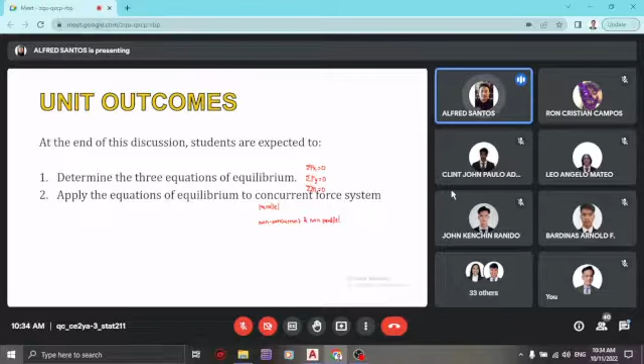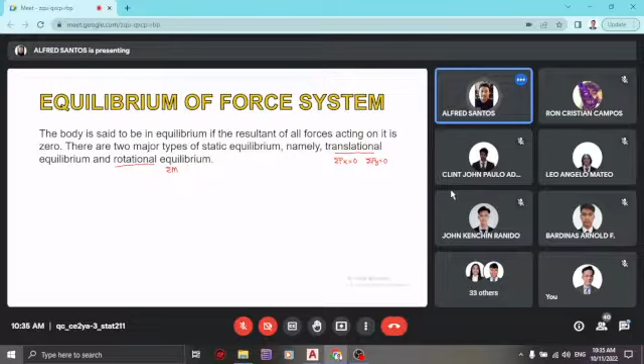Concept-wise: the body is said to be in equilibrium if the resultant of all forces acting on it is zero. There are two major types of static equilibrium: translational equilibrium, meaning it won't translate into x and y direction, so summation Fx is 0 and summation Fy is also 0. And rotational equilibrium means it won't move or rotate, so summation moment equals 0.

For the concurrent force system, the applicable formulas are the two translational equilibrium equations: summation Fx is 0 and summation Fy is 0. Why? Because in a concurrent force system, all forces meet at a certain point or common point. If you take the moment at that point, the moment of all those forces is 0, so it's useless to use summation moment. That's why it's not included, and summation Fx and summation Fy are used instead.

So where do we use the concurrent force system? We'll use this in the method of joints, for the analysis of trusses.

Using method of joints. So later on, next meeting, we'll go to trusses or analysis of structures. Let's apply what you learned here to our topic next week. And then the second force system is parallel force system.

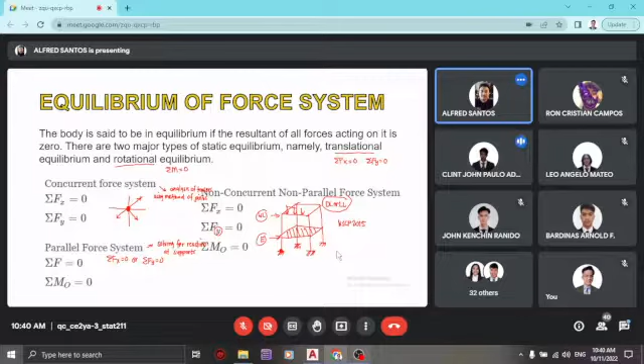So let's go to concurrent force system before we proceed with problem 1 and 2. We mentioned earlier the formulas involving concurrent force system: summation Fx is equal to 0 and summation Fy is equal to 0. And there are important points that need to be remembered.

Two forces are in equilibrium if they are equal and oppositely directed. So for example, you have a 50 kilonewton force upward. This object will only be in equilibrium if it also has a 50 kilonewton force downward. When summation Fx is 0, summation moment is 0, and summation Fy, which is 50 minus 50, they are equal to 0. Meaning, when all three are equal to 0, our object is in equilibrium.

Same goes with horizontal forces. If you have 20 kilonewton here, the object will only be in equilibrium if you have 20 kilonewton to the left. Understood? So that's important point number 1.

Number 2, three coplanar forces in equilibrium are concurrent. So if you have three forces, for them to be in equilibrium, they must be concurrent or form a force triangle. Same goes with 3 or more concurrent force systems in equilibrium forming a closed polygon when connected head-to-tail. So how does that work? For example, you have 4 forces: this is F1, this is F2, this is your F3, and this is your F4.

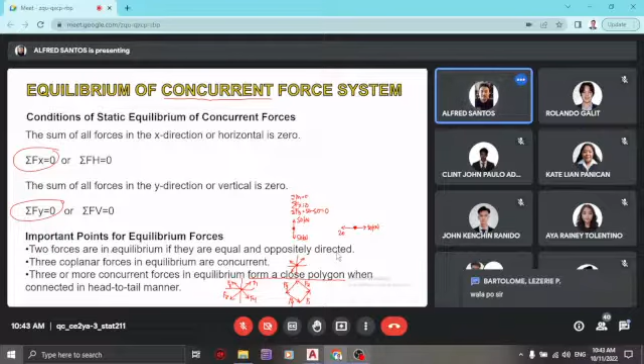So, problem number 1. So, the figure represents the concurrent force system acting at a joint of a bridge truss. So, truss yan. Tapos, concurrent force system. So, nabanggit ko na kanina, di ba? Kapag method of joints, ang gagamitin natin sa pag-analyze ng truss, gagamit ka ng concurrent force system. Okay? So, the system, determine the values of P and F to maintain equilibrium of the forces.

Okay? So, since concurrent force system yan, dalawa lang yung applicable na formula. So, they are summation Fx and summation Fy, which are both equal to 0. Okay? So, if that's the case, may dalawang method dyan. It's either you can use your calculator using mode 5.1 or mode 5 two unknowns, dun sa mga Canon na calculator. Dun sa mga Casio, it is mode 5.1.

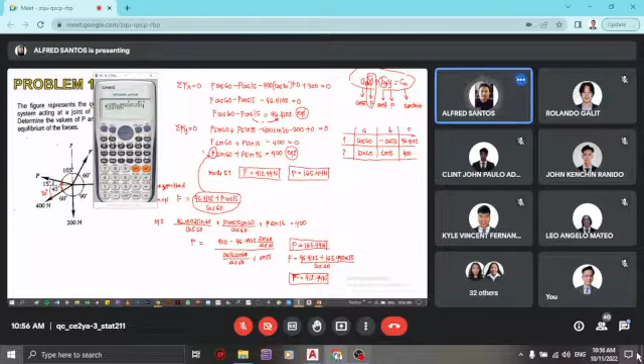Wala naman. Hello? Wala po, sir. Mark Ferrer, may question ka? Wala po. Rolando, may question ka? Wala naman po. Jerica?

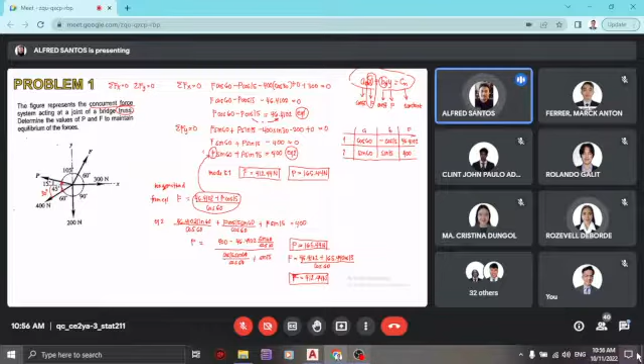Sa problem 2, irapan natin ng konti lang. So, the system of knotted cords shown in the figure below supports the indicated weights. So, compute the tensile force in each cord. So, alam niyo behavior ng tension or tensile force? It is to pull away, or to pull. So, pag pahatak, lagi siyang papalayo sa joint.

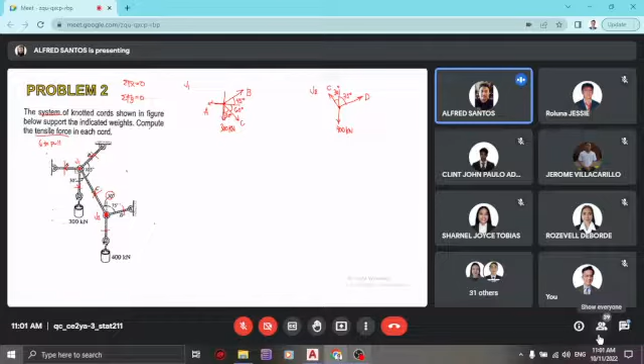So hindi pwedeng unahin si J1. Bakit? Kasi dalawa lang yung equations mo. So pag dalawa yung equations mo, dapat yung isa-solve mo una, dalawa lang yung unknowns. So hindi mo masasolve si A, B, C using just two equations only. J2 yung unahin natin. So sa J2, summation Fx is equal to 0.

So it is negative C sine of 30 plus D sine of 75 is equal to 0. And then summation Fy is equal to 0. So you have your C cosine of 30 plus D cosine of 75 minus 400. Simplify natin: C cosine of 30 plus D cosine of 75 is equal to 400.

And then you can apply mode 5.1. This is your C and this is your D. So it is negative sine 30, positive sine 75, and then 0. And then cosine of 30, cosine of 75, and then 400. So what's your C? Kayo muna.

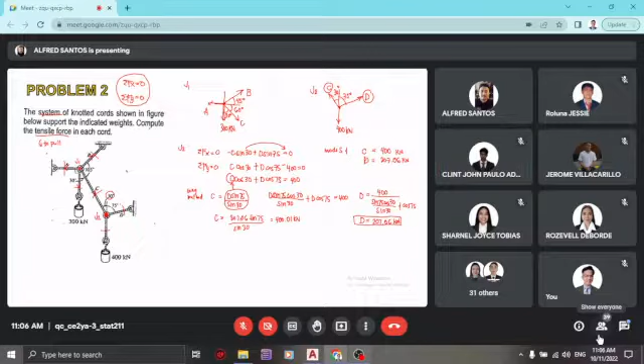Okay, so you have now your value of C, which is 400. So it means this is also 400. So nakita nyo na important points kanina, yung number 1. So yung C, saka yung C dito. So they are equal and they are oppositely directed. So pag pinagsama ko sila, it means they are still in equilibrium. Tama?

So tama yun, no? So punta tayo kay J1. Okay, and first, so I use Fy is equal to 0. Bakit? Kasi pag inuna ko si Fx, dalawa yung unknown. So nandyan si A, nandyan si B. Pero pag inuna ko si Fy, meron bang Y component si A? Wala naman, di ba? So it means I can immediately solve for B, using summation Fy is equal to 0. So it is B sine of 45 minus 300 and minus 400 sine of 60 is equal to 0. Kasi nga, 0 yung Y component ni A. Kasi horizontal force siya. Okay?

Nasundan? So solving for B, it is 300 plus 400 sine of 60 divided by sine of 45. So this is your B. So this is 914.16 yata or baliktad, 916.14. So pa-solve na lang ako. So what's your answer? Tama lang, sir. So 914.16, your B.

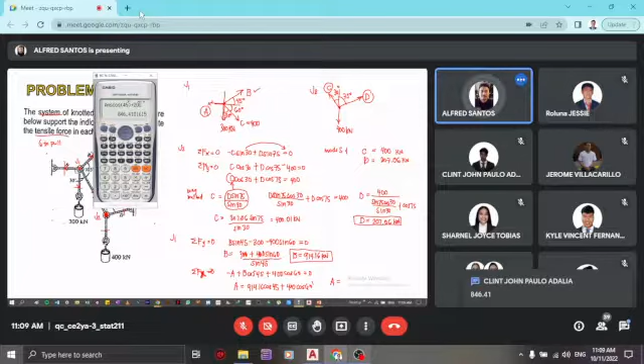Okay, so your A is equal to 914.16 cosine of 45 plus 400 cosine of 60. Okay, so ang nilipat ko, si A yung nilipat ko sa kabila, no? Kaya naging positive siya. So this is your A. So what's your A? 800. Ano yung A mo? 846.41. Okay, thank you, Clint. Okay, so that's your A, B, C, D. No, yung tension sa A, sa B, sa C, and sa D.

Okay, so concurrent forces lang yan. No? So, kaya? Naintindihan? Or may tanong? So, sabihin nyo lang pag may tanong kayo.

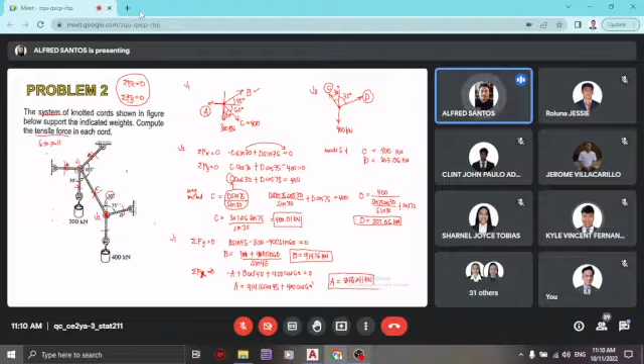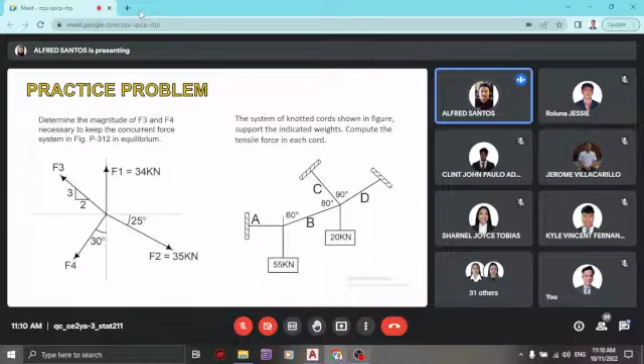So, anyway, so this is your practice problem. So, try nyo na lang mamaya if you have time. No? Okay, so parallel force system tayo. So again, alam niyo yung parallel force system, yung resultant niya paano kumuha, no? So it is summation F and summation moment then to solve for D. But this time, hinahanapin natin yung mga unknown forces. Hindi natin hahanapin yung resultant nila. Kasi alam naman natin kapag equilibrium, yung resultant niya is 0. Okay? So ano yung hanapin natin?

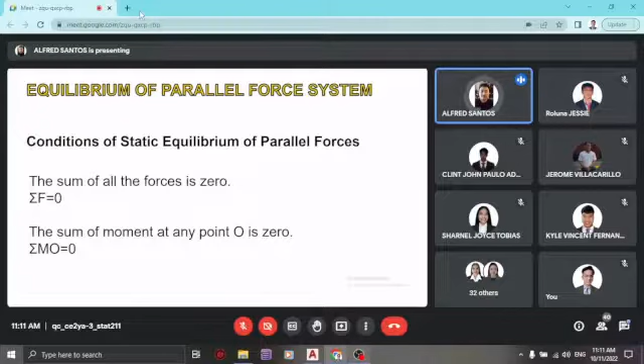So nawawala dito yung mga reactions sa support or simply yung mga reactions. No? So kung vertical forces lahat ng given, definitely yung reaction mo are vertical reactions. Okay? So nabanggit ko na kanina, isosolve natin yung mga reactions. So these are the conditions of static equilibrium pag parallel forces yung usapan. So summation F is equal to 0 and sum of moment at any point O is 0. Okay? So opposite tayo sa problem 1, involved pa din dito yung mga distributed loads, no, yung rectangular, triangular load and trapezoidal load.

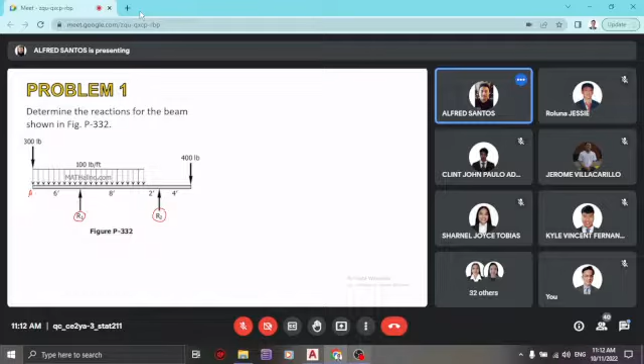Okay? So determine the reactions for the beam shown in the figure. So this is the figure which came from mathalino.com or dun sa libro lang ni Ferdinand Singer na Engineering Mechanics, yung kulay blue. Okay, so ang hinahanap sa problem, yung reactions at point 1 or reaction 1 and reaction 2. Okay, so let's say this is your point A, point B, point C, point D, and point E.

Okay, applicable daw na formula are summation F. So this time Fy tayo kasi vertical forces tayo, no? And then summation moment at any point O is equal to 0. But take note of this, no? So bigyan ko kayo ng tips or ito talaga yung actual step, no? So the first step is you'll apply summation moment at any point of support or point of unknown.

Okay. So magmo-moment ka at any point of support, reaction, or unknown. So for example, ito yung given natin. So saan ako magmo-moment dyan? Which is the first step. Saan? Saang point? Sige nga.

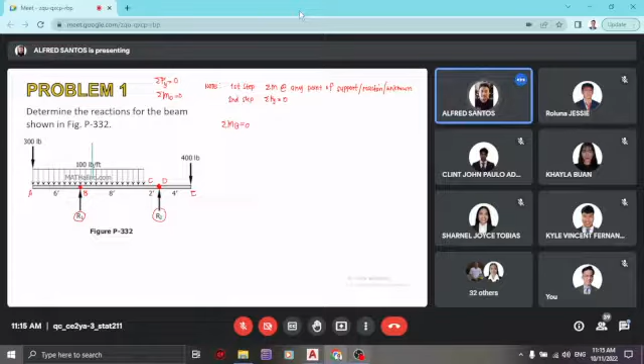Okay, and then the second step will be summation forces vertical is equal to 0. Okay, so start tayo. So, summation moment at B is equal to 0. So, pakita ko rin yung moment sa D mamaya. So, solve muna natin yung resultant neto ni 100 pounds per foot or yung uniformly distributed load natin. So, this is 100 times 14 or WL, which is equal to 1,400. Area lang ng rectangle. So, your height is 100 and your length is 14, 6 plus 8. And then this is 7 feet.

Bakit? Kasi sabi dun sa definition ng resultant ng distributed load, the value of the resultant of the distributed load is equal to the area of that distributed load and it acts on the centroid of that area. Kung natatandaan nyo yan. So, therefore, this is also 7 feet. So, kalahati-kalahati. L over 2, L over 2. Okay, so if this is 7, and then this is 8, yung buo na to.

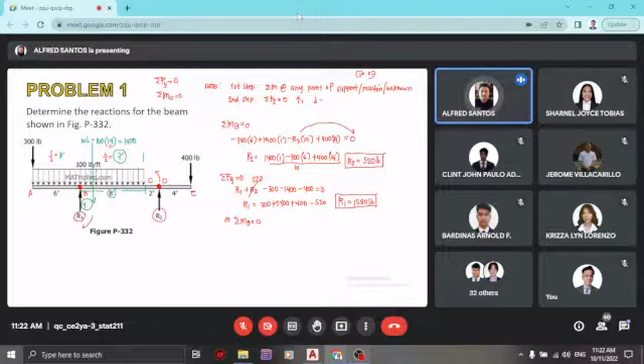Or you can use summation moment at D is equal to 0 to solve for R1. Kasi pag nag-moment ako kay D, 0 yung moment ni R2. So therefore, may eliminate siya. So we can solve for R1. So try natin, para marunong kayong mag-moment. So negative 300 times, what's the distance from point D? Sige, tingnan natin kung marunong na mag-moment.

16, sir. 16. Okay. Thank you, Jerome. Plus R1, which is multiplied by... Sige, 10, guys. 10.

Sino yan? Si Kyle? Yes po. And then minus 1400 times... sige, kahit sino, 7. Kyle, ano sa'yo? 9. Okay, 9. So saan galing si 9? 7 saka 3, 2. Or 10 minus 1.

Okay, and then plus 400 times 4. Ito hindi ko natatanong yan. Obvious naman 4, no? Is equal to 0. So solve natin si R1. Lipat ko yung constant, lahat ng constant sa right-hand side ng equation natin. So it's 1400 times 9 plus 300 times 16 minus 400 times 4, and then divided by 10.

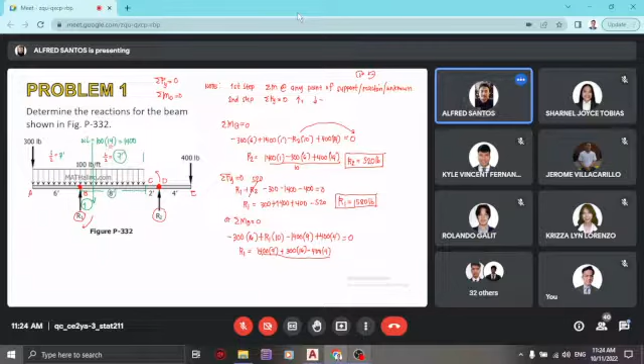So what's your R1? It must be the same, no? Tingnan natin kung same siya. Syntax error. So that's also 1580.

So pili kayo kung saan kayo mas komportable, no? Pero pag ako yung nagsasolve sa on my own, tatlo yung ginagawa ko, tatlo na yan, para ma-check kung tama ba yung sinosolve ko.

Okay? So that's your problem number 1 for parallel forces. So proceed tayo sa problem 2, kung wala kayong tanong.

Okay, problem 2. Seems wala naman tanong, no? So ganun pa din. Let's say this is your point A and then this is your point B. So your first step is summation moment at point of unknown or point of support.

So moment ako sa A. Nasanay kami na sa kaliwa lagi nagmo-moment, para same lahat yung direction ng pababa sa kanan pataas. So pag nag-moment ka sa kaliwa, pag pababa yung force mo at nasa kanan siya, it means clockwise, positive siya. Kung pataas naman yung force mo doon, nasa kanan siya nung point A, it means counterclockwise yung direction niya.

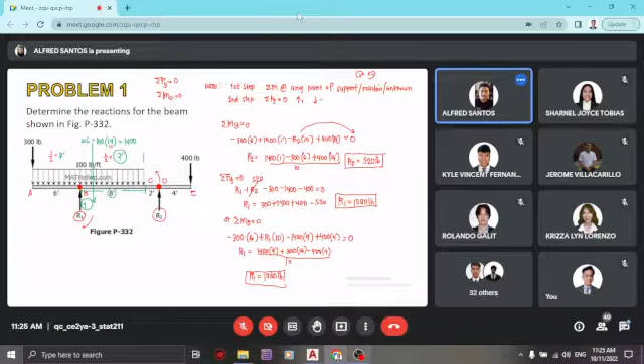Okay, para na lang kung ganito, kagaya nung kanina. Ito, pababa to, kaso negative siya kasi nasa kaliwa siya. Anyway, basta clockwise, counterclockwise, alam niyo naman na yun.

So but first, kuhanin muna natin yung mga resultant natin, kasi meron tayong distributed loads. Pero kung master niyo naman siya, kahit hindi niyo na-drawing dito, which is ganun yung ginagawa namin pag pagtungtong niyo ng higher years.

Pakita ko lang, hindi na namin ginagawa, kinukuha pa yung resultant pati yung centroid, para lang ma-solve mo. Ayan, for example ito, 8 times 6 times 3, that's WL times L over 2, di ba? Nakikita nyo? 8 yung height, 6 yung length niya, tapos yung distance niya is 3. So that's 8 times 6 times 3. Wala na yung resultant niya, hindi na namin ginagamit.

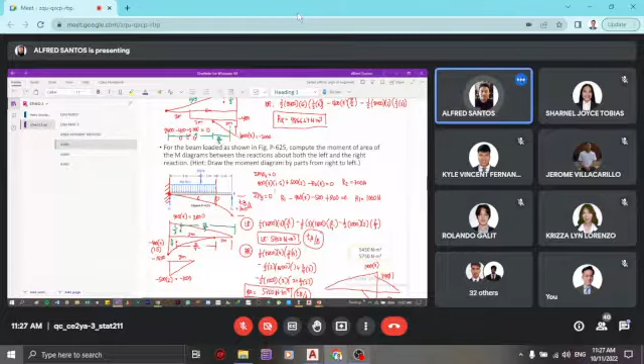Teka lang, pakita ko lang sa inyo na hindi na siya ginagamit normally. Ayan, wala din siya, so that's 400 times 3 times 1.5. 400 yung W, yung L mo is 3, 2 plus 1, tapos kalahati ng L, so that's 1.5. Mapapractice din kayo habang tumatagal, na ganun yung gagawin nyo. Dapat ganun yung mangyayari sa inyo pag tungtong nyo ng higher years, yung hindi na ginagawang ganito.

So 6 times 3, so this is 18, and then this is 1/2 WL, so that's 15 times 3, or equal siya sa 22.5. Okay? And then centroid natin, so this is 1.5, this is 1.5, and then this is 2L over 3, so this is 2, and then this is L over 3 or 1, 1 meter.

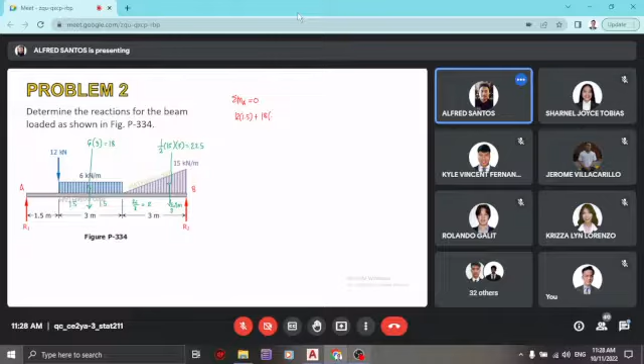Okay, so moment tayo sa A is equal to 0. So it will become 12 times 1.5 plus 18 multiplied by, what's the distance of 18 about point A? Ano distance natin? 3, sir. 3. Okay, so saan nanggaling yung 3?

So it is 1.5 plus 1.5, and then plus 22.5 multiplied by, ang distance natin, 6.5, sir. Okay, 6.5. So saan nanggaling si 6.5? 1.5 plus 3 plus 2, which is etong 2, etong 3, sa etong 1.5.

And then minus R2 times 7.5. Okay? So simplify natin para ma-solve natin si R2. Lipat ko siya sa kabilang side para siya yung maging positive. And then 12 times 1.5 plus 18 times 3 -- alam na ako saan nanggaling yung 3 -- at plus 22.5 times 6.5 divided by 7.5.

So this is your R2, equal siya sa 29.1 kilonewton or 23.4. Alin ba? Alin ba yung tama? So kayo yung last section para dito, no? Kaya huwag kayong magtaka kung kabisado ko na yung sagot.

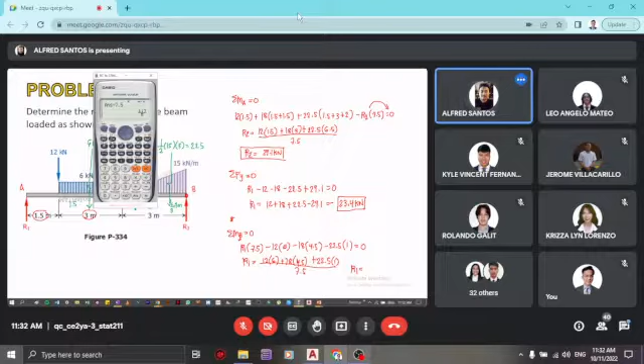So your R1 is equal to 12 times 6 plus 18 times 4.5 plus 22.5 divided by 7.5. So let's multiply by 1. So your R1 must be equal to 23.4. No? So that's 23.1. I mean 23.4, sorry.

Okay, may question ba so far? So we can proceed with problem 3. Wala naman.

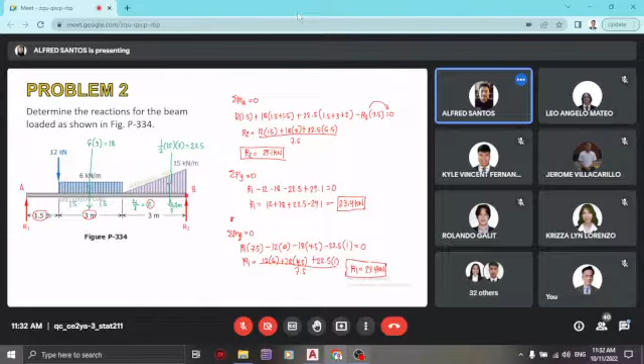Okay, problem 3 tayo. So this is a combination of two parallel forces. So katulad kanina sa system of knotted cords, ganun din dito. So the upper beam shown in the figure is supported at D and a roller at C, which separates the upper and lower beams. So determine the values of the reaction at A, B, C, and D. So neglect the weight of the beams.

So if I'm about to draw the free body diagram, they will meet at this point, at point C. Okay? So if this is your upper beam, meron kang 160 kilonewton, you have here 190 kilonewton. And then sa every support, meron kang reaction lagi. So this is your Dy. And then this is your Cy. Okay, so support ni Cy saka ni Dy yung 160 saka yung 190 kilonewton.

So ang distances nila, this is 4 meters daw. This is also 4 meters. Tapos ang total distance ni Cy saka ni Dy is 10. So therefore, this is 6 meters. Okay, and then meron kang lower beam.

So sa lower beam, you have here your A and your B. So you have here AY and BY. So you have here 400 kilonewton. And meron kang CY dito. So ibig sabihin lang nun, yung load na 160 saka 190, pag kinuha mo yung reaction sa CY saka sa DY, matatransfer yung load na yon sa lower beam at point C. Gets nyo?

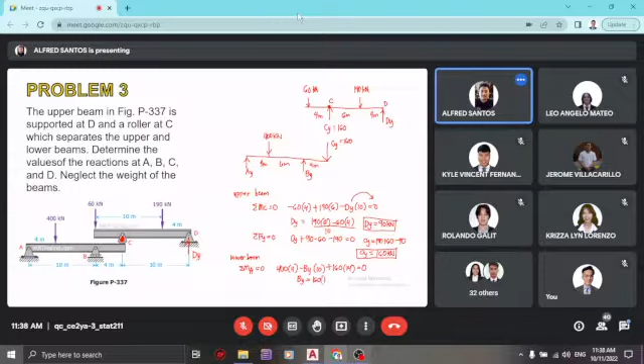Okay, and then punta tayo sa lower beam. So this is summation moment at A is equal to 0. So therefore, we can solve for By. So it is 400 times 4 minus By times 10 and then plus 160 times 14. So this is your By. Lipat ko sa kabila para siya yung maging positive. So divided by 10.

10, naging 100 na. So what's your By? 384. Yeah, solve niya.

384. Okay, so that's 384. And then to follow yung AY which can be solved using summation Fy is equal to 0. So this is your AY minus 400 which is a downward force. By is 384 and then minus 160. So what's your AY?

Lipat mo lahat sa kabila yung constant. So it is 560 minus 384, or equal siya sa 176. Tama? 176? Okay, tama yan.

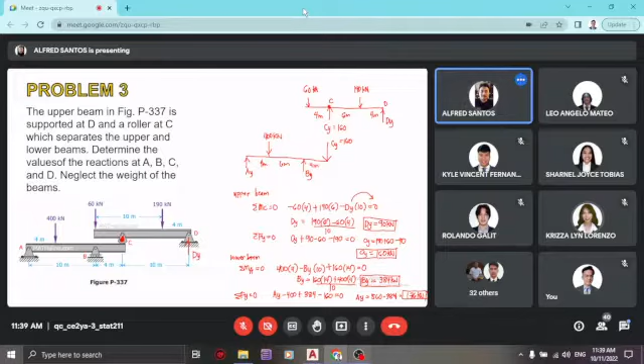Tama ba? Opo sir, okay. So that's your parallel forces or parallel force system. Okay, so you have your practice problem, number 4. Try nyo lang sagutin. Madali lang naman siya, para lang ma-practice kayo mag-moment kasi gagamitin natin siya sa analysis of stresses.

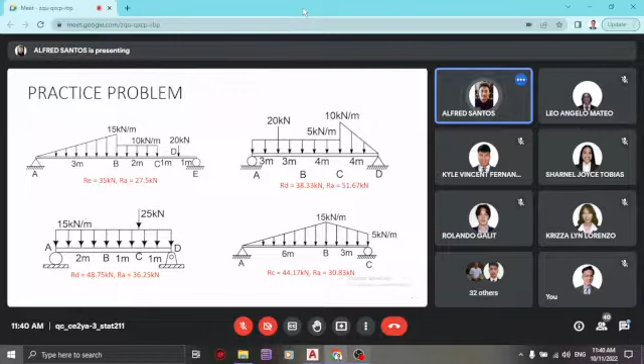Okay, so down to the last 2 problems, last topic tayo. So non-concurrent, non-parallel force system. Tingin ko kaya pa naman, no? Kaya niyo pa? 2 formulas pa lang naman ginagamit natin. 3 equations lang naman to. So 2 problems, madali lang naman to.

Non-concurrent, non-parallel force system. Dito gagamitin na natin yung 3 equations of equilibrium. So they are summation Fx, summation Fy, and summation moment at any point O, all equal to 0. Okay? So pwede siyang mag-solve ng 3 unknowns sa system. And kung lalagpas siyang 3 unknowns, so indeterminate structure na yon. It means it can only be solved using the principle of strength of materials and theory of structures, which is your subject for second year, second sem, yung strength of materials or MECDEF na tinatawag, mechanics of deformable bodies.

And then yung theory of structures, subject niya siya sa summer ng second year and sa first sem ng third year.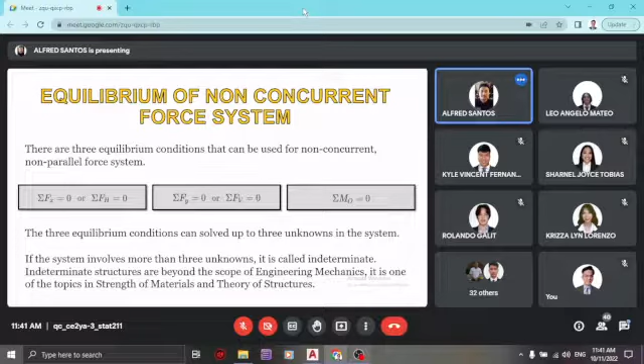Okay, so a boom AB is supported in a horizontal position by hinge A. So meron kong hinge at point A. Mamaya discuss natin ano yung hinge, no? Which runs from C over a small pulley at D as shown in the figure. So compute the tension T in the cable. Ito yung nawawala. And then the horizontal and vertical components of the reaction at A. Neglect the size of the pulley at D. So meron kang nawawalang horizontal and vertical components daw ng reaction at A.

So lagi yung tatandaan kapag pin support or hinge support, ganito yung normally yung itsura niya. Meron kang triangle and meron siya pinagpapatungan na fixed end or fixed position na horizontal o eto. No? So lagi yung tatandaan, meron kang 2 reactions dyan.

Okay, so meron kang RY and then meron kang RX. That's why ang pinapahanap sa problem is eto. Eto pala, horizontal and vertical components of the reaction at point A. So kung lalagay ko siya dito, meron kang AY dito and meron kang AX. And then hahatiin ko yung cable para ma-expose yung tension. Para pag dinawin ko yung FBD ng boom AB, ito na lang yung kalalabasan niya.

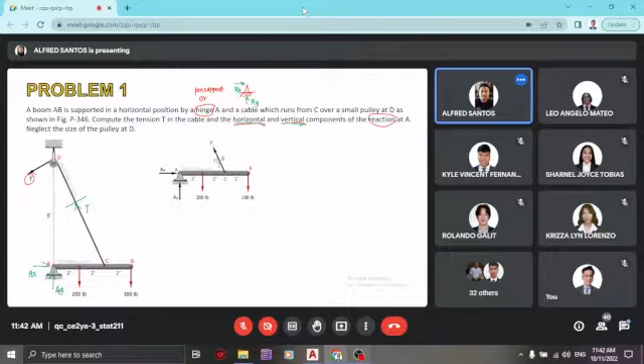Okay, so this is FBD of boom AB. Okay, so you have your AX and your AY. Tapos yung tension T. So saan galing yung slope niya?

Yung 2, 1 square root of 5. Kung mapapansin yung triangle na malaki, which is 8 saka 4. This is 8, this is 4, this is 4 square root of 5. If you solve it, yung ginamitan mo ng Pythagorean theorem, so ginawa niya, dinivide lang niya yan ng 4. Kaya naging 1, 2 square root of 5. Okay, nasundan yan.

And since non-concurrent, non-parallel na siya, meron ka ditong TY. And meron kang TX, that's the X and Y components. So yung TY is equal to T multiplied by 2 over square root of 5. And then yung TX naman is T times 1 over square root of 5.

Okay? So lagi yung tatandaan, kapag binigyan kayo ng non-concurrent, non-parallel, ang first step lagi is summation moment at hinge. Take note of that, no? Summation moment at hinge. So bakit? Kasi pag nag-moment ako sa A, dalawa kagad yung ma-eliminate. So it means masosolve mo si TY or si T. Okay, zero yung moment ni AX, zero yung moment ni AY.

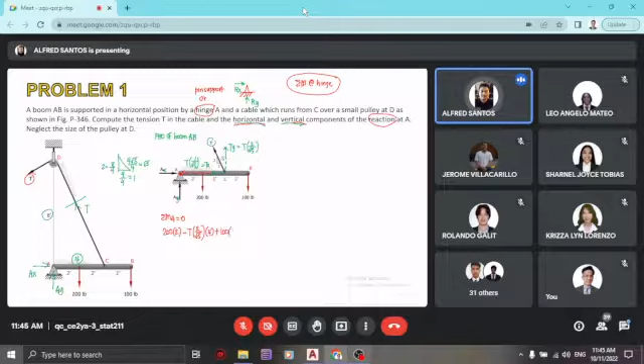So lipat ko sa kabila to para siya yung maging positive. So your tension is 200 times 2 plus 100 times 6, divided by 2 over square root of 5 times 4. So what's your T? So it is 279.51, I guess. No? So solve na lang natin.

So okay, so that's 279.51. It's pounds. Pounds ba? Okay, pounds. Okay, nasusundan. And then summation Fx tayo is equal to 0. So your Ax is going to the right, so it is a positive force. And then negative Tx ka naman. So alam niyo yung Tx. So Ax is equal to Tx. So equal din siya sa T times 1 over square root of 5.

So your Ax is equal to 279.51 over square root of 5. So this is equal to 125 pounds. Okay, nasusundan pa ba? And then last, summation Fy tayo is equal to 0. So you have your Ay as positive, negative 200, negative 100, and positive T multiplied by 2 over square root of 5. So ano to? Ito si Ty. Okay? So equal to 0.

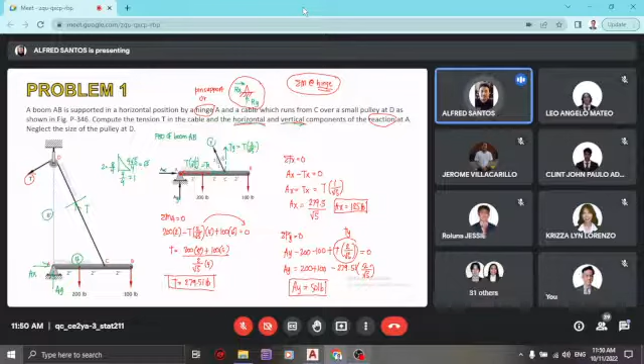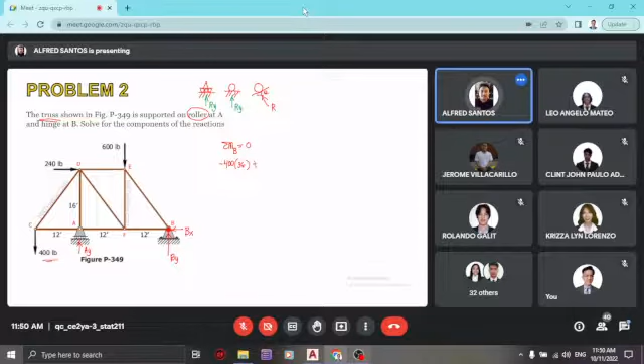Summation moment at hinge. So, moment tayo sa point B. Pag nag-moment ako sa B, ito yung moment niya. So, negative 400 times 36. Distance niya is 36. And then plus 240 times 16. So clockwise and then 16 yung distance niya. And then plus Ay counterclockwise times 24. Clockwise ba? Counterclockwise ba? Counterclockwise po. Ayan, pupunta siya dito. And then yung 600 yung counterclockwise.

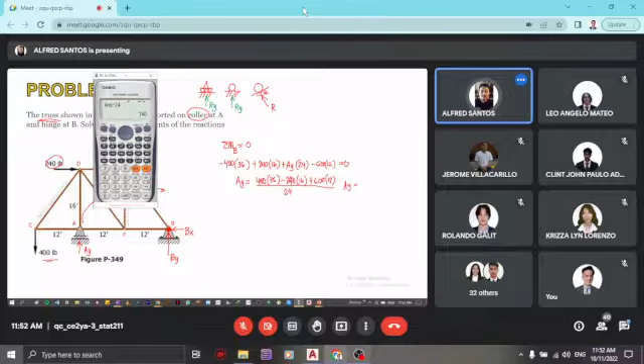Okay, so what's your Ay? Sulat na natin. So nilipat ko lahat ng constant sa kabilaan, kaya sila yung nag-change sign. What's your answer? 740. Oh, 740. So tama yan. Divided by 24, so that's 740. It's still in pounds. And then summation Fx. So it is 240 pounds positive papunta sa kanan, and then negative Bx which is papunta sa kaliwa. So silang dalawa lang, therefore your Bx is also 240 pounds.

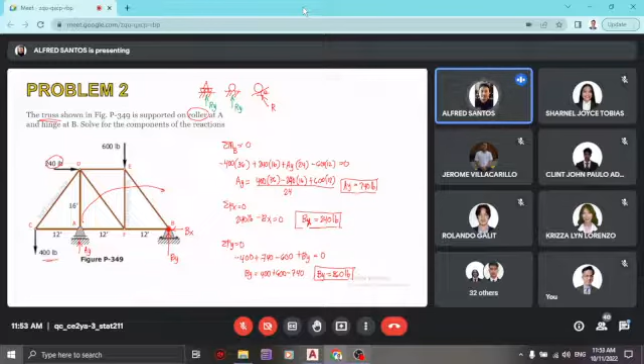And then summation Fy tayo is equal to 0. So you have negative 400 plus Ay which is 740, and then minus 600 plus By is equal to 0. So this is your By. So it is 400 plus 600 minus 740. Tama ba? 260. Opo. So that's 1,000 minus 740, so that's 260. Okay? So that's the conclusion ng equilibrium.

So attendance lang tayo before we leave. Gusto niyo pa ba mag-attendance o huwag na? Attendance, sir. Putik, talo na yung T1. Pangit ng drop. So attendance lang tayo. Grade 11, may grade 11 ba sa inyo? Malapit na rin midterms nyo, no? After Holy Week. After November 1, November 2, the following week. Dash 3 ng QC. Binugbog sila ko.

Okay. John Allen. Present po, sir. Clint, Dahlia. Present po, sir. Risa. Present po. Arnold. Present po. Desiree. Present po. Kyla Buwan. Okay, nandyan si Kyla kanina. Ay, nandyan pa siya. TJ.